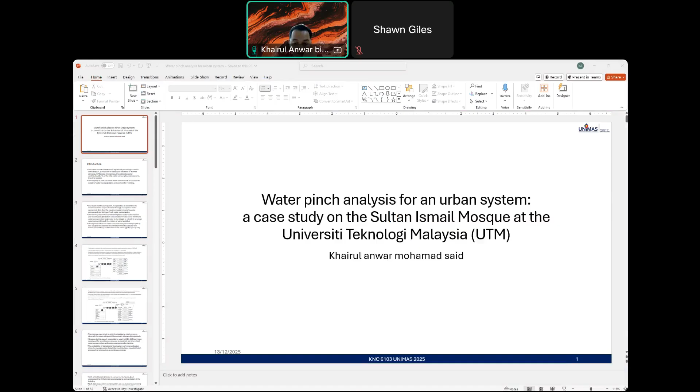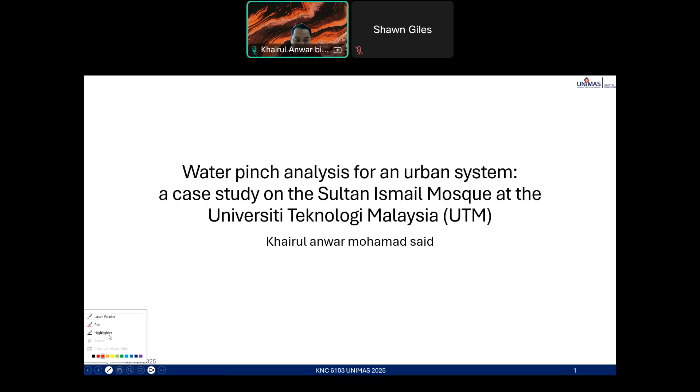What is the pinch? So for this topic, we will refer to this slide, and some of the information is not available in the slide, but is available in the paper itself.

The urban sector contributes a significant percentage of water consumption, particularly in developed countries of warmer climates. In Malaysia, for example, the domestic sector contributes 60% of the total consumption compared to other sectors. This is statistic from 2006.

The majority of work on urban water conservation is focused on design of water saving gadgets and wastewater recycling.

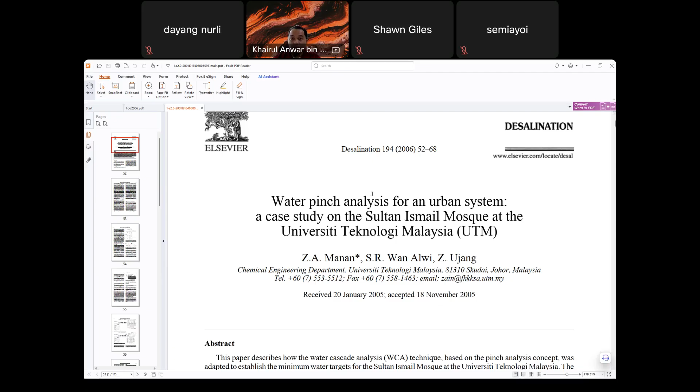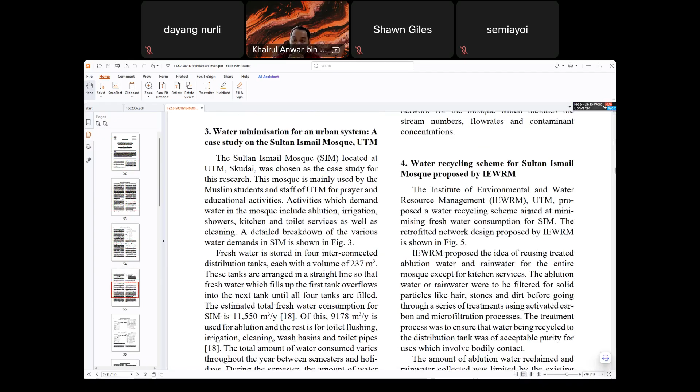So for the first proposal coming from the Institute of Environmental and Water Resource Management, UTM, they proposed a water recycling scheme aimed at minimizing fresh water consumption for SIM. The retrofitted network design proposed by IEWRM is shown in Figure 5. This is the treatment.

So the proposed idea is to reuse treated ablution water and rainwater. If you refer to this, another source of water, this is not part of the network distributed from the distribution tank. This is the rainwater harvesting.

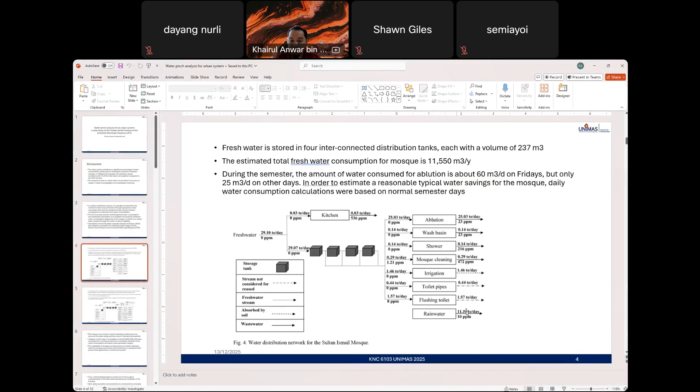So for the proposed system, it will be using activated carbon and microfiltration process. The treatment process was to ensure that water being recycled to the distribution tank was of acceptable purity for uses, which involve bodily contact.

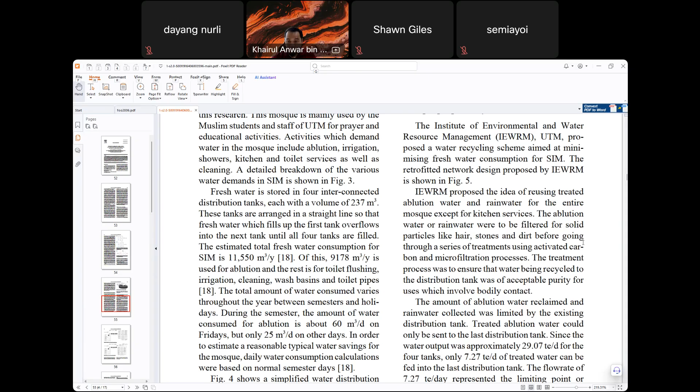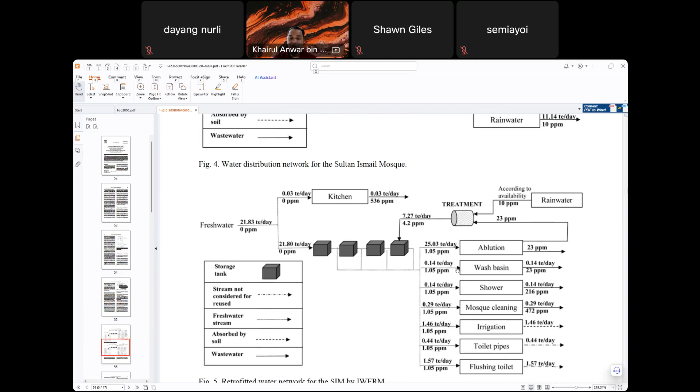So the water from the treatment, refer to page 56. So water from the treatment, this is versus IEWRM, goes back to the distribution tank, mixed again with the fresh water.

So instead of using 29 ton equivalent per day, since we can reuse, then treat it plus rainwater, they can save around how much? Around 8 ton equivalent per day by installing the treatment, the amount of ablution water requirement.

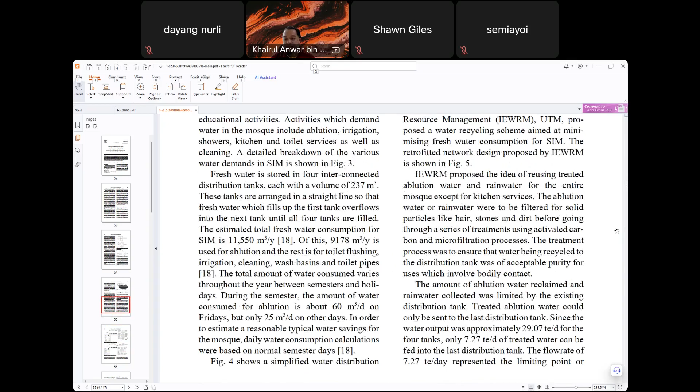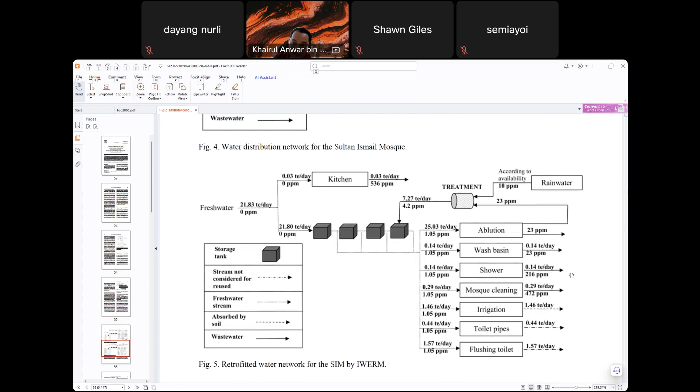So for this method, the IEWRM, they didn't do any water cascade analysis. Meaning they just think, okay, how about we treat the ablution, since ablution has the highest, around 25 ton equivalent a day.

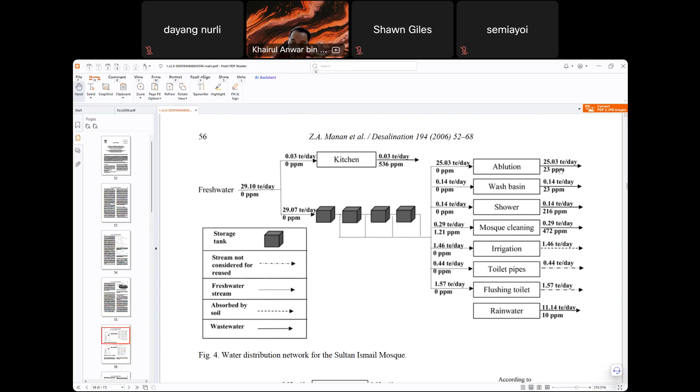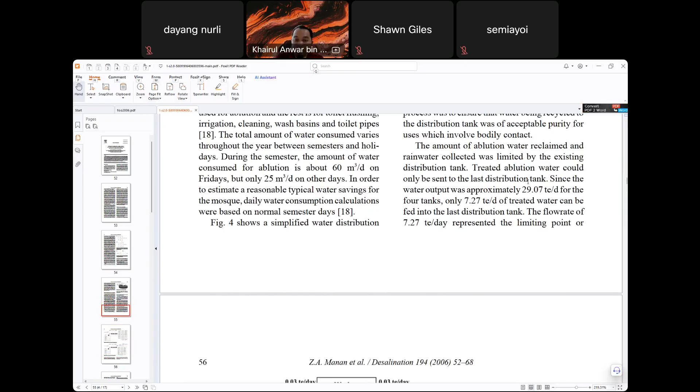So the amount of ablution water reclaimed, rainwater collected was limited by the existing distribution tank. Treated ablution water could only be sent to the last distribution tank. Since the water output was approximately 29 for the four tanks, only 7.27 ton per day of treated water can be fed into the last distribution tank. The flow rate of 7.27 ton per day is the limiting point or bottleneck of this system.

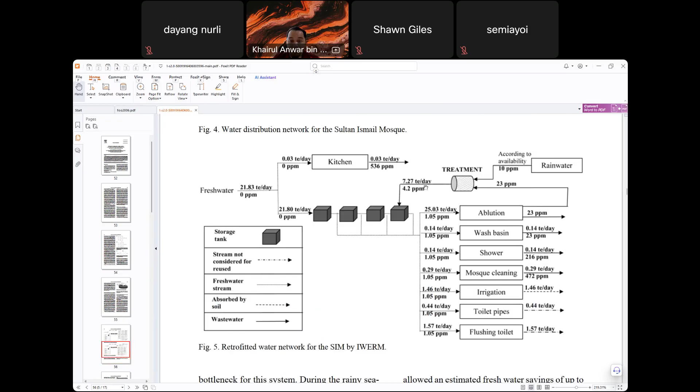So during the rainy season, rainwater was collected instead and spent ablution water diverted to the sewer. So this is the drawback. During the rainy season, rainwater was collected and the spent ablution water, meaning water from the ablution, goes straight to the sewer, since the system is only capable of recycling 7.27 ton per day. So this design allows an estimated freshwater saving up to 25% with a payback period for investment of 10 years.

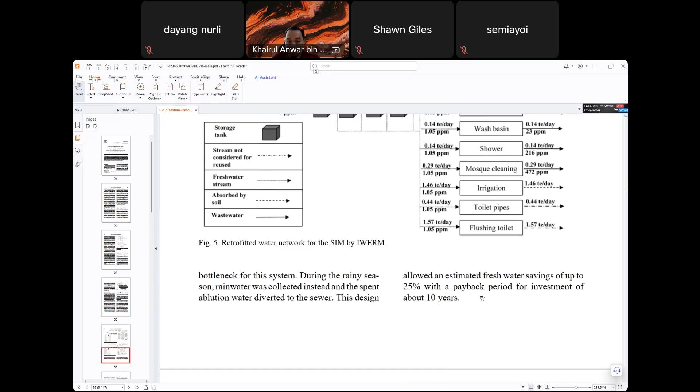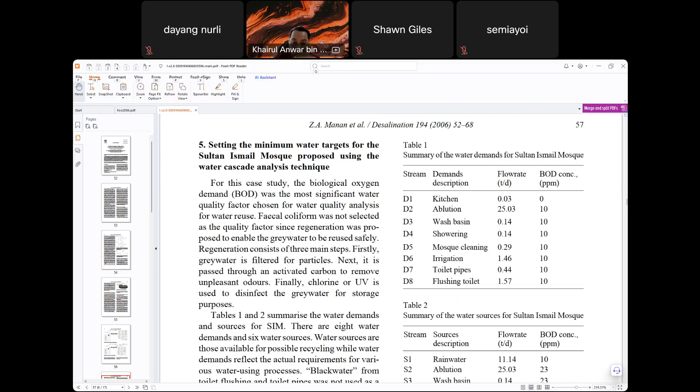Okay, that is the first proposal.

The mosque study is strictly speaking a batch process, since all the water using utility occurs in discrete time periods, based on the praying time. That's when the water using utility will occur. This is why it's like a batch process.

However, in this case, it is possible to use the WCA technique developed for a continuous process to establish minimum freshwater consumption with water generation target. The availability of storage and fixed pattern of water utilization allow the mosque case study to be modeled as a repeated batch process that approaches a continuous system.

First, a total building review is carried out to have a good understanding of the initial water supply and sanitation of the building. So for this study, they are using BOD to determine the water quality.

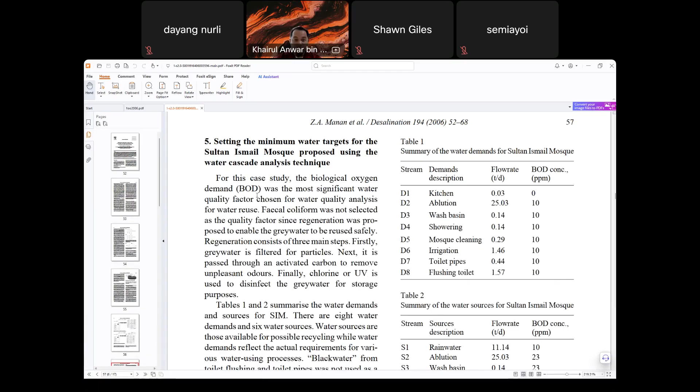For this case study, they are using BOD. Fecal coliform was not selected as the quality factor since regeneration was proposed to enable the grey water to be reused safely. This regeneration consists of three main steps: first is filtration for particles, next is activated carbon, then chlorine or UV used to disinfect the grey water for storage purposes.

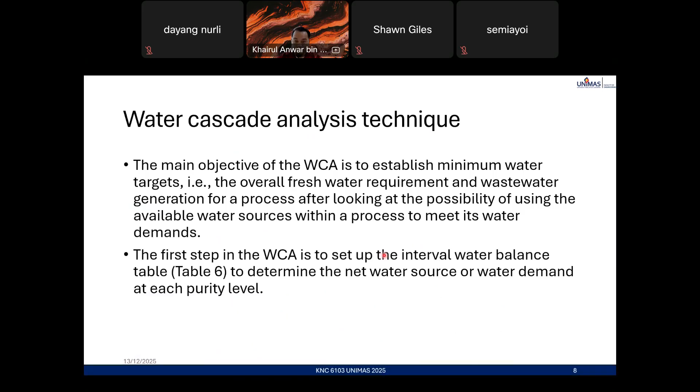Table 1 and table 2 summarize the water demand and source for SIM, which is short form for Sultan Ismail Mosque. There are 8 water demands, 6 water sources, 8 water demand.

Yes, 8. So the water demand is water going to the ablution, wash basin, kitchen, and others - all going into the white box, except for the water source. Then the water source is water coming out from the white box - the box of kitchen, ablution, wash basin.

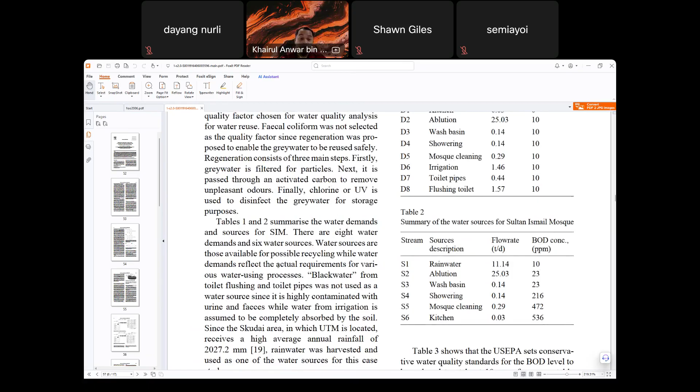So in this case, rainwater is the water source. Water sources are just available for possible recycling, while water demand reflects the actual requirement of various water-using processes, black water.

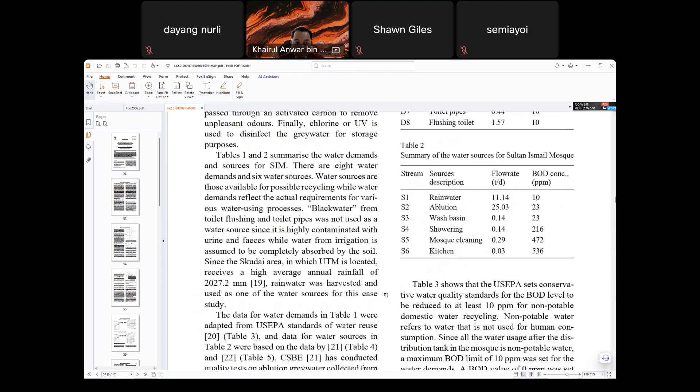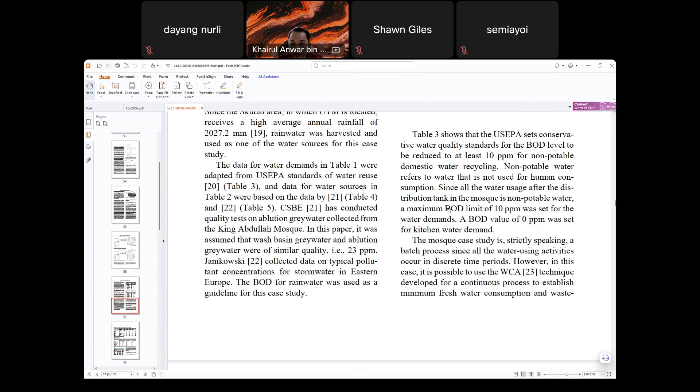Table 3 shows here - the US EPA set conservative water quality standard for BOD level to be reduced at least 10 ppm for non-potable domestic recycling. Non-potable water refers to water not used for human consumption, but you can use it for bodily contact, just not for consumption.

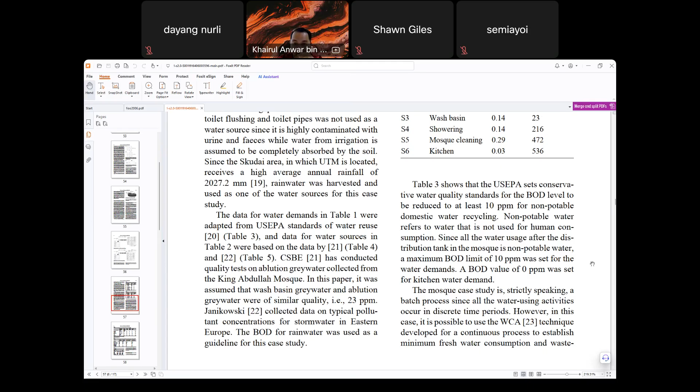So it's not drinkable. Since all the water uses after the distribution tank in the mosque is non-potable water, a maximum limit of 10 ppm was set for the demand. A BOD value of 0 ppm was set for kitchen water demands, since the kitchen uses fresh water.

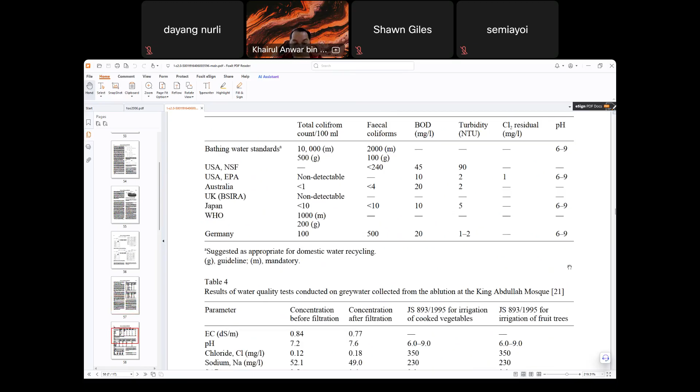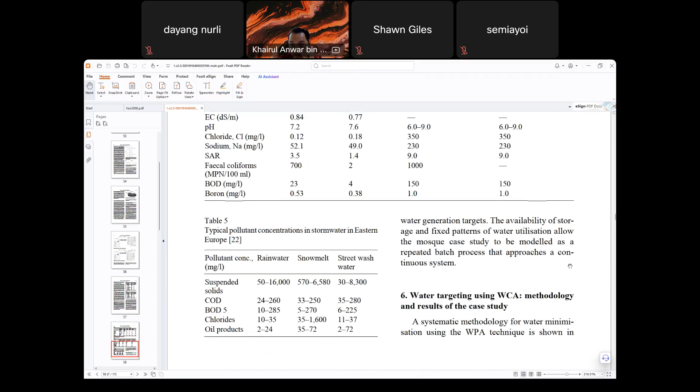Now is the water targeting using WCA. If you remember what the cascade diagram is...

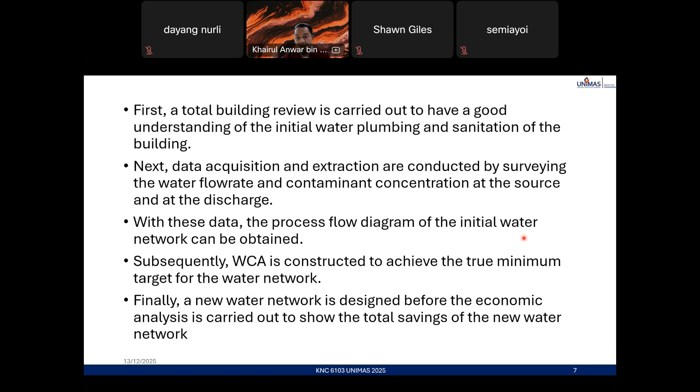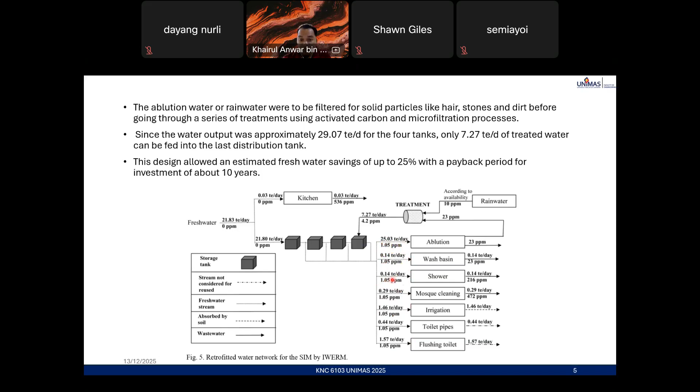Meaning in the figure, the input inlet for the quality is all 10 ppm, 20 ppm - it's not necessarily must be 0. If it's 0, then you just use fresh water, like this is using fresh water.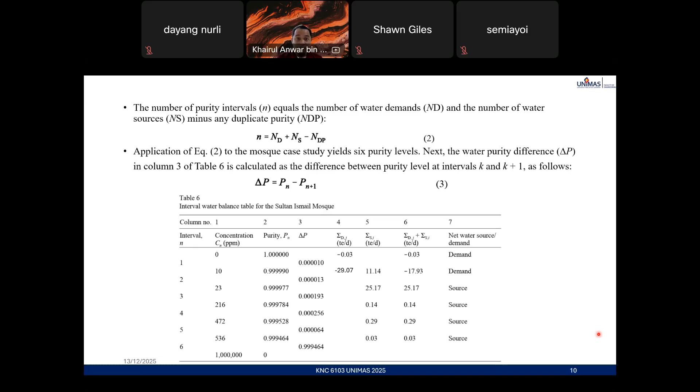Yes, this is the water cascade diagram. So before we can do the water cascade analysis, we start with the interval water balance first. For the interval water balance, compile all the data from the process diagram, process flow diagram. Once done, then we can draw the water cascade - not necessarily draw.

You can actually use water cascade analysis by extending this table 6 as well, but the table will be very long. But at the end, it's the same thing. So therefore, the water cascade analysis - for any water cascade analysis, we will start with the fresh water feed 0.

We assume the system will not require the clean water in order to find the minimum water target. So this minimum water target will be later on the minimum fresh water needed for this system. So the first column, this is from table 6. From table 6 as well, this is from table within P1. Okay, from here, the cascade started, the fresh water feed to 0.

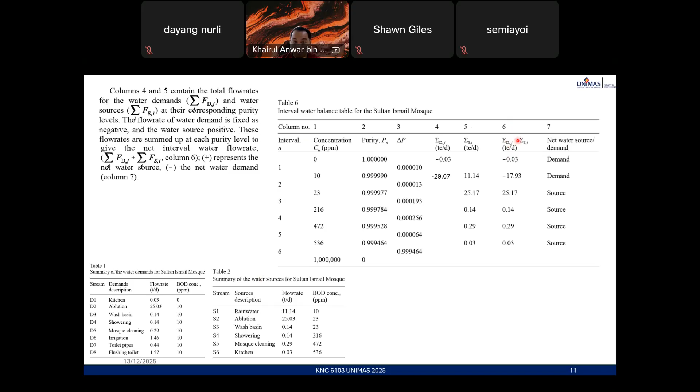Then it goes to the summation of demand plus the source. This one, column number 6. That is what? So this is aligned with the level. This is the table. Next is we do the cascading.

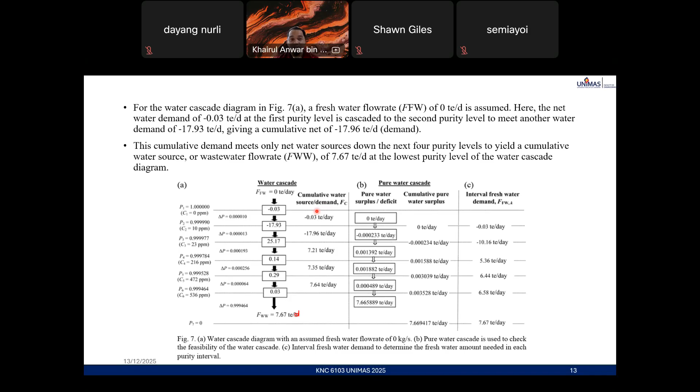Cumulative water source/demand: 0 plus negative 0.03 plus this one, get negative 17.96 plus 25.17, we get 7.21, and so on, plus till level 6 concentration, the highest concentration.

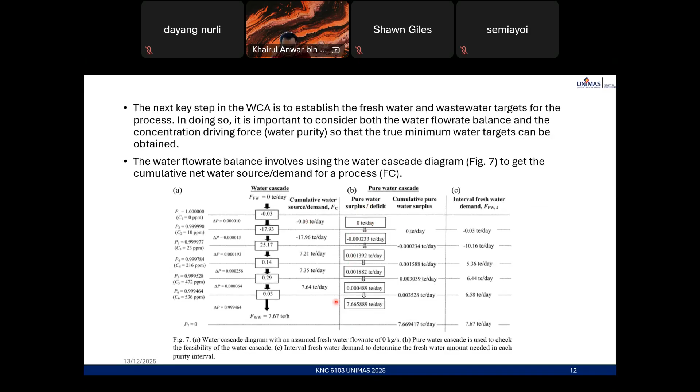From cumulative water source or demand, the method is the same based on previous slide. This is the pure water surplus or deficit. For pure water surplus deficit, it's actually multiplying the product of the cumulative net resource or demand and the purity difference delta P - so meaning cumulative water demand multiply with the delta P.

So for the first pure water surplus, the value is not zero, but it's a lot of zero - how many zero? 6 of zero: 0.0000003, or negative 3 times 10 power of negative 7. Not sure why they put 0, maybe because the value is very, very small. The system or whatever, they just assume it's 0, otherwise it's not.

And do the same for the other interval. So this one is still 17.96, 0, 3, 0. It is 0.00023308, it's similar, until the value will be 7.67.

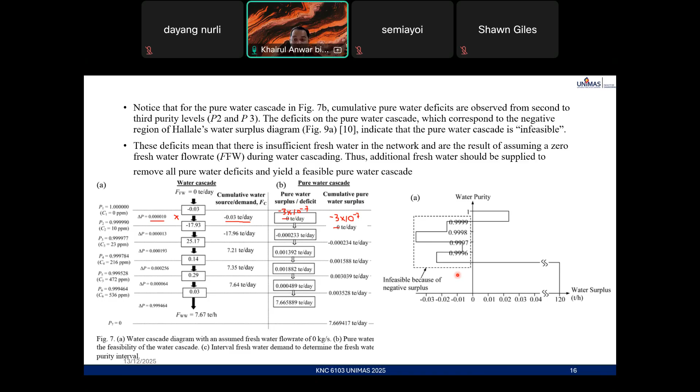Fresh or pure water is to be supplied at the highest purity level. In our case, the highest purity level is 0 ppm. To minimize fresh water, it is necessary to determine the minimum flow rate of fresh water, or the interval fresh water demand, that will satisfy the total water requirement at each purity level. The interval fresh water demand restores a feasible pure water cascade to the water network.

In figure 7C, okay, we already calculated this one using this equation.

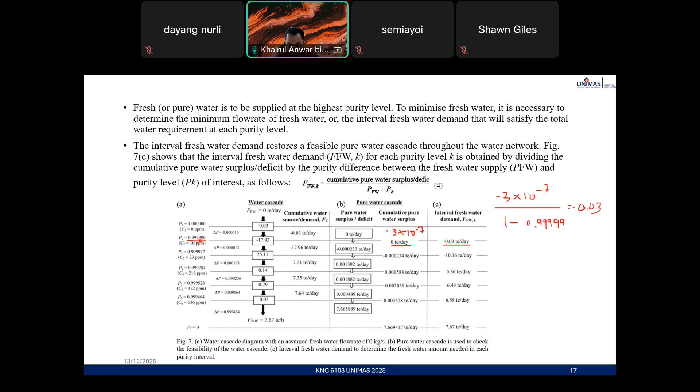This is based on the highest purity available for the process. If the highest purity is 10, then P2 is 0.99999. Okay.

Yes, we will see it. Referring to figure 7C, interval freshwater demand. A negative value for FFW means there is insufficient fresh water, whereas a positive FFW means there is excess fresh water at the purity level K. So here is insufficient fresh water.

This is excess fresh water. In order to ensure there is sufficient fresh water at all points in the network, at the end, this column C, the fresh water demand must be all positive - it must be excess to ensure sufficiency.

A fresh water flow rate of exactly the same magnitude as the absolute value of the largest negative, negative 10.16, should be supplied at the highest purity level of a feasible water cascade. So the FFW4... W4 kah? W3, yeah, level 3, of 10.16 lah.

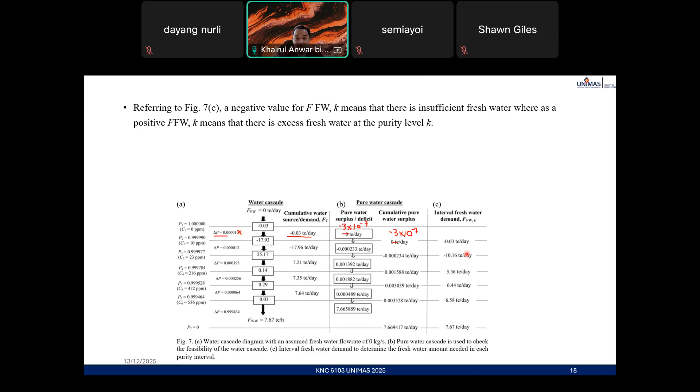So the highest negative value is the minimum water required to make a feasible water cascade. So this value negative 10.16 goes to the freshwater feed. Then we do the cascading calculation again.

But now, before this, we assume it's 0. Why do we assume it's 0? To identify how much is the minimum water target. Since we identify the minimum now, then we use the minimum as the reference for the freshwater required system.

This is the same as table 6. The difference is now the minimum is 10.16.

If you still remember, without the water cascade analysis, they need around 29 ton equivalent per day. The method one proposed by IEWRM can only reduce up to 25%, from 29 to 21 fresh water needed per day. But using cascade analysis can reduce up to 10 ton equivalent per day.

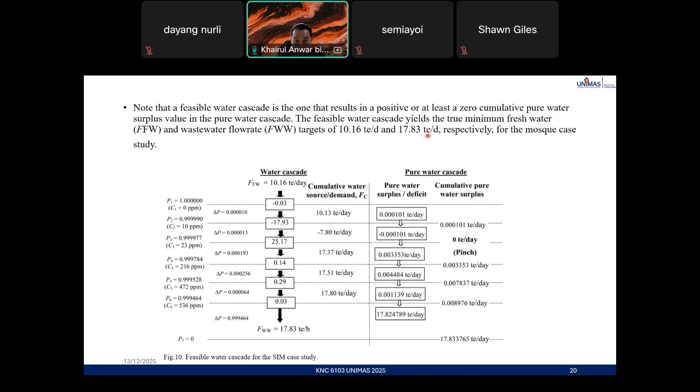Initial design achieved the maximum water recovery objective for the plant, the water cascade, the water surplus. Pure water surplus cascade again can be included in the interval water balance table to form the water cascade table, WCT.

So how to reduce it more? We need to regenerate.

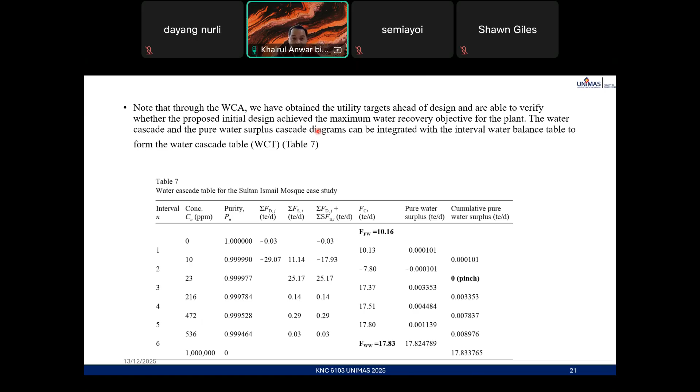Through the WCT, page 63, the WCA technique offers two key advantages over the water surplus diagram in realising the minimum water target, apart from its power to eliminate the tedious iterative step of the water surplus diagram to yield the exact target and pinch location quickly.

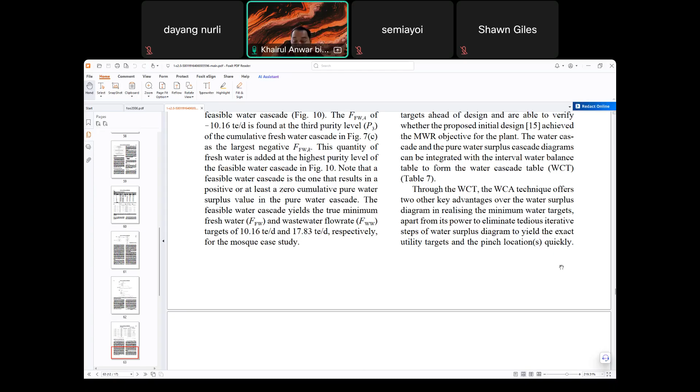Now in the case of the water surplus diagram, only the minimum freshwater target is known. However, the target of the minimum wastewater flow rate is not available from the diagram.

The second key advantage of using WCT is that it enables designers to identify the pinch causing stream and the exact water allocation for the region above and below the pinch to achieve the minimum water target for the unit design.

Note that the pinch causing stream which exists at this purity level is the water source summation Fs of 25.17, referring to table, this stream is generated from the two water sources: the ablution and the wash basin.

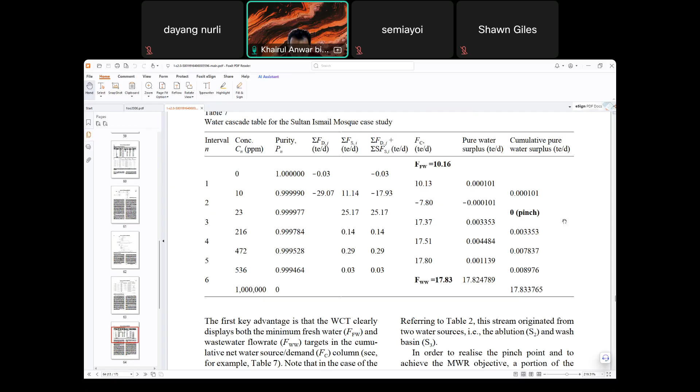This must be sent to the region above the pinch. So if above the pinch, then you can see how many - the 10 and the 0. The 10 and the 0 is one, referring to table 1.

Oh, even can go to the rainwater. No lah.

So most of the 10 ppm is in the water demand. This must be sent to the region above the pinch. Negative sign indicates sending water across in reverse.

On the other hand, 17.37 is below the pinch, found between P3 and P4. At level P3, P4, if you refer to table 7, this one is a different interval. It must be sent to the region below the pinch.

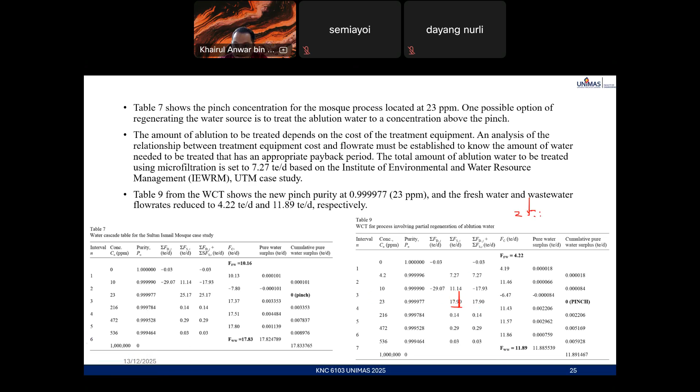They use that value, treated the ablution water, which is why if you see ablution water in Table 2 it's actually 25.17. So this value is 25.17, minus 7.27, you get 17.9.

So they treated it until the concentration goes to 4.2, above the water demand - minimum water demand.

Minimum water demand for this case, the water cascade, is 10 ppm. Since this is lower than that, in ascending order we need to do it again like this minus. So for 23 ppm, some of it have been treated - that's why the value here is smaller.

So again, refer to Table 1. For 0 ppm it's only Table 1 kitchen, not Table 1, only for kitchen. At negative 0.03, this is the new purity level.

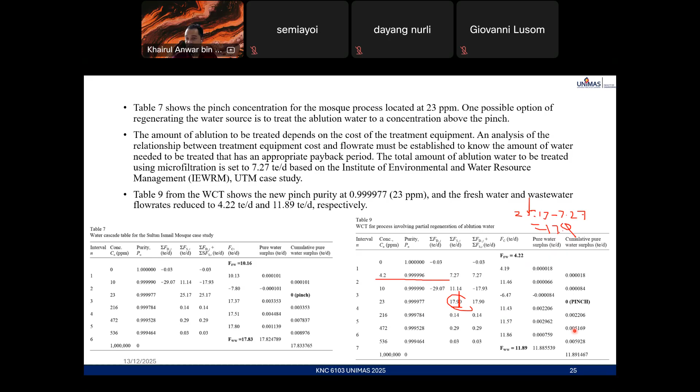So if you answer the question later, you start with FW0, get the minimum water target. Once you identify it, it goes to the FFW, make a new table, recalculate everything, then that minimum target will turn to 0, which is the pinch for that process.

So after the regeneration, you can see here it's true - the guideline: if you regenerate above the pinch, it will reduce the amount of wastewater needed, freshwater needed, and the wastewater generated. With the regeneration, it's reduced to 11.89 only.

So designing a water network that reuses wastewater is needed due to shortage of freshwater and to reduce the cost of wastewater treatment. Regenerating and reusing wastewater reduces freshwater consumption and wastewater emission. Wastewater can be reused directly in other water-using operations if the level of contaminant does not interfere with the operation - that is, reducing both wastewater and freshwater volume without changing the mass load of the contaminant.

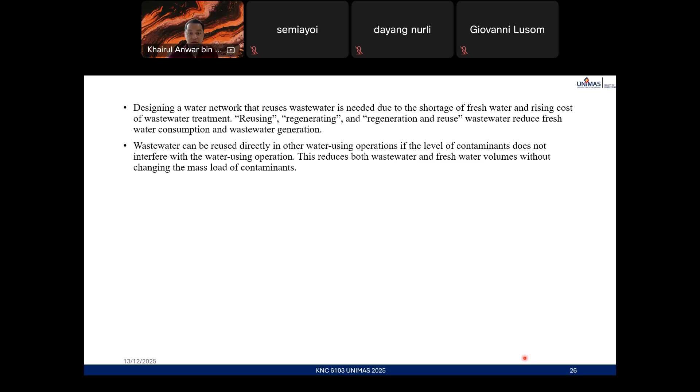The system proposed by IEWRM predicted a freshwater saving of 35%, wastewater rejection by 19.8%, by retrofitting treatment for the ablution and the rainwater source.

The system suggested by the water pinch method predicts 65.1% freshwater saving and 51.5% wastewater rejection for regeneration. Even before regeneration, it's a lot, meaning we just recycle or reuse the water someplace else.

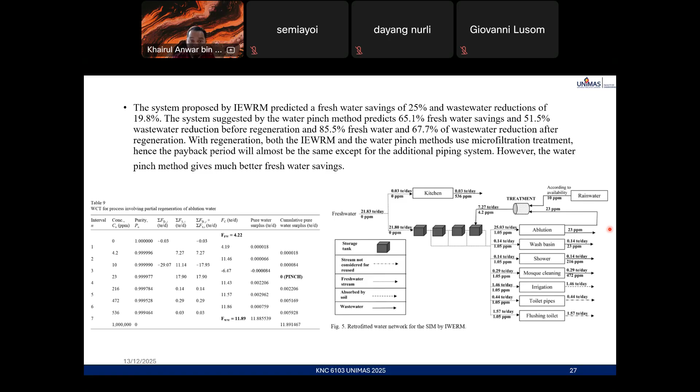So for the worst case scenario, there's no rain, so we just omit the rainwater as a source altogether. We calculate using the water cascade analysis table. The potential freshwater saving theoretically is 63.9%, and the wastewater reduction is 72.5%, which is better, still better than the IEWRM method.

The WPA can target minimum freshwater and wastewater flow prior to design, while the IEWRM method needs to design the system first. This is the advantage of using WPA, water pinch analysis.

So we do the calculation when we already know, based on this condition, we can reduce up to how much - 65%, 85% with regeneration. But for the IEWRM, they didn't know; they need to install the system first, then do the testing and see how much it's reduced.

So with WPA, one can efficiently and sustainably plan water saving for a building.

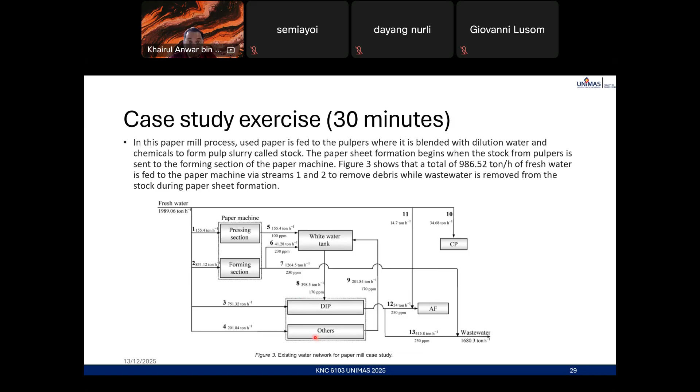Part of the water source, stream 5 and 6, are then sent to the white water tank along with recycled water stream 9, from the other process in the deinking pulper.

So the DIP refers to the deinking pulper. The DIP source stream, worth 54 tons per hour, is mixed with flow coming from stream 11, to dilute the stock in the pump, which we get to later, in the approach flow system area.

Freshwater stream 10 is also used to dilute the de-inking chemical in the chemical preparation section, CP, before the chemicals are sent to the DIP unit to process the ink removal.

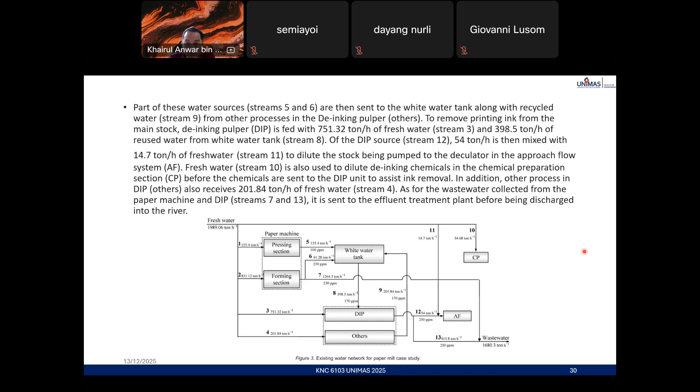Calculate the minimum utility target for the paper mill using the cascade analysis technique.

So table 1 shows the water demand and source for the case study. Water demand is water inlet: stream 1, 2, 3, 4, 7, 8.

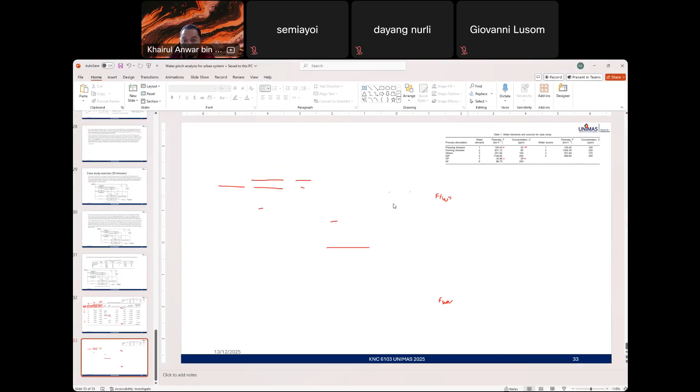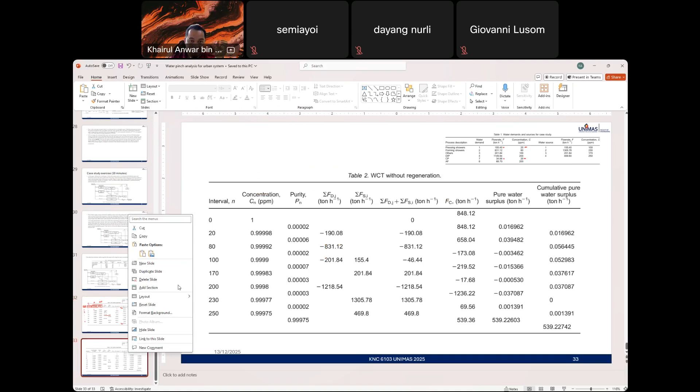It's the same thing, but very similar. It's actually wrong from the start. Wrong from the beginning. So it should start with the interval. This one. This one.

Yeah. Right. Right. Um, so it should start with interval.

So it should start with interval. Interval is n, level is k. I think most papers will stick with that nomenclature. So interval, start with interval 1, 2, 3, 4, 5, 6, 7. So the next column is the concentration in ascending order.

At concentration 0, purity is 1. So this is the fresh water. In this case, the fresh water, they assume it's very clean, so the source is 0 ppm. Although it's stated, it is stated.

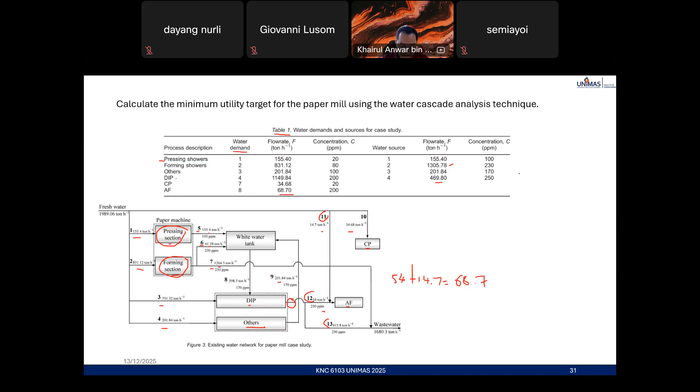So you try this. You start with 0. Get the 848 here. If you start with 0 here, the value should be 848.

If you refer to something, regeneration, yeah - wait. So for the paper mill case study, you see the PPM, right? The PPM is based on TSS, the suspended solid. For the case study, Sultan Ismail Mosque is using BOD as the basis for water quality.

So the regeneration - for the regeneration, if possible, do it before, above the pinch. Here is the best. 1305, the concentration is very high, 230.